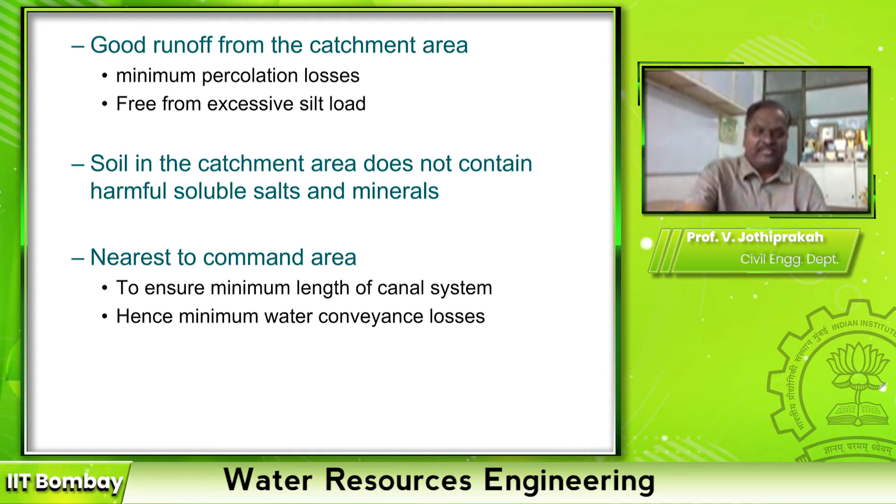These are some of the points: preferably a deep reservoir so that evaporation loss will be very less, land cost per unit capacity is less, and it is less prone to weed growth.

Weed growth means when the dam is full, the water is under submergence. When the depth is small, more area will be under submergence. Even when you draw the water less than 1 meter, more area gets exposed, so there will be a huge growth of weeds. Unnecessarily, next year when water comes, it will take more water than what you draw for the downstream side.

Then water quality depends upon the soil type and vegetation type on the upstream side. As far as possible, the dam site should be away from flooding tributaries, mainly to prevent sediment flow, and it should have impervious rock formation for minimizing leakage in the riverbed.

Otherwise, you store the water and next year all the water goes into the soil. It will work as a percolation pond rather than a dam.

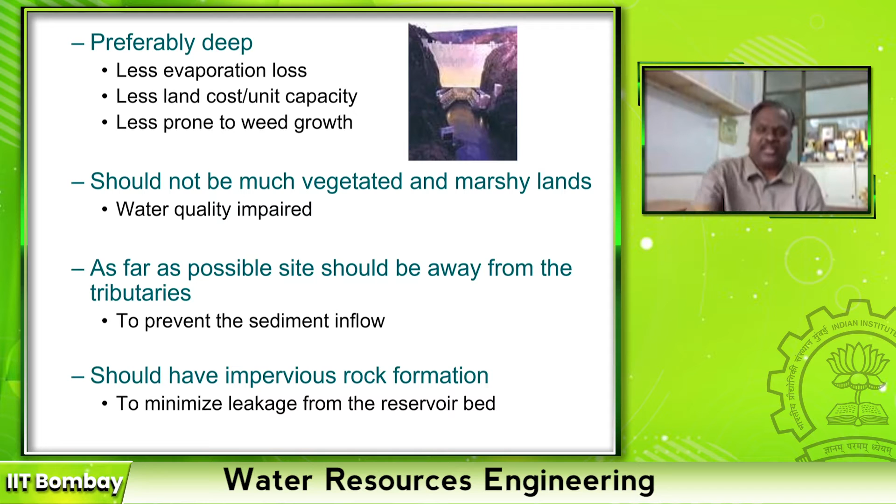The reservoir banks adjacent to the hilly region should have good abutments for stable construction of the dam. The acquired land to be submerged in the reservoir should not be very valuable, like areas with settlement of population. That's what we also do rehabilitation and resettlement for.

Resettlement and rehabilitation is called RR policies. A huge number of researchers are working on how to settle them, because when I construct a dam across the river for a particular height, a huge area, kilometers square, gets submerged under water.

Whether any settlements are there, we have to do proper resettlement. The next consideration is that the selected site should be easily accessible through roads and railways during construction and after construction, for operation and maintenance.

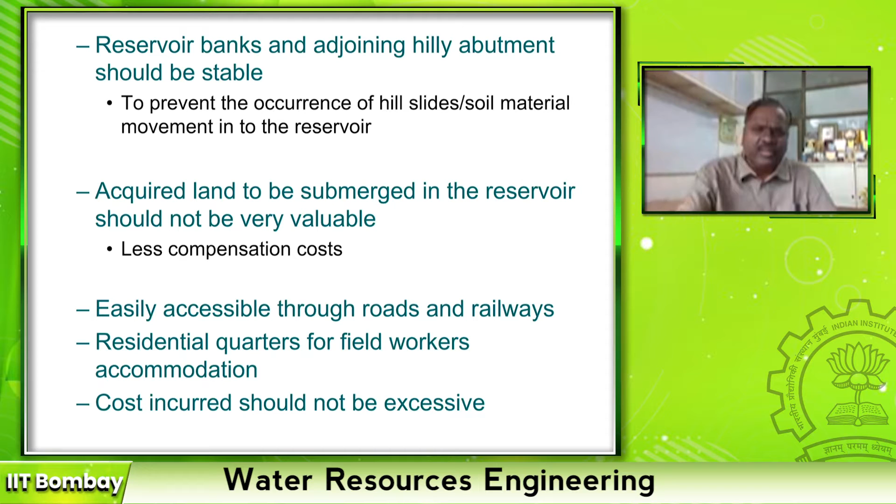Residential quarters for field workers, or office quarters after construction of the dam, should be constructable there. Then the cost incurred for the construction should not be excessive. These are all small considerations.

After considering these 4 or 5 factors, you select a particular site. For each and every site, we should do site-specific investigations. What we have done so far is site selection.

Site selection actually means considering the surrounding of the site. When I select each and every site, I must do the site investigation, so that it becomes a sound and economical project. This includes the study of various alternatives regarding the layout of the scheme.

If I do a dam at this site, what are all the other alternative constructions or layout requirements? The final alternative selected site shall be fully justified, so that after starting the work, nobody should point out that the wrong site was selected. So before selection, we have to do all the possible investigations.

Once I select 2-3 sites for the dam construction, the first step is to do a topographical survey, that means you prepare a contour map. I think you have studied this in your geodesy course, you have to do a contour map.

This can be done either by plane table surveying, traverse, aerial photography, or using any other surveying methods, mainly to prepare a contour map to determine how much water will get spread in that area.

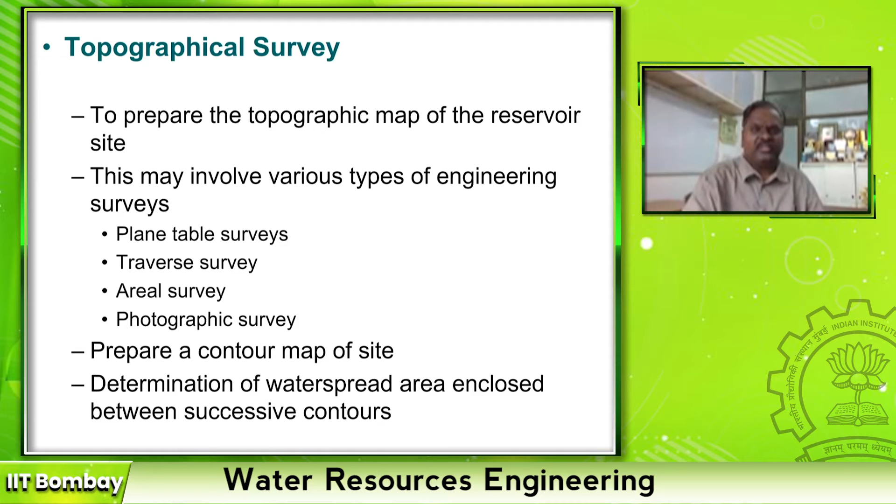There are three types of volumes: we have seen dead storage, useful storage, and flood storage. How to store it, then the area elevation curve - how to draw this area elevation curve? We will see one by one.

Suppose if my height of the dam is up to the 2 meter level, then the area of submergence will be up to the area contour line of 2 meters. If my dam height is 3 meters, then the area of submergence will be at the banks of the 3 meter contour. Then at 4 meters, this area gets submerged. At 5 meters height of the dam, the 5 meter contour gets submerged. So as the height of the dam increases, the area under submergence also increases.

See, this is not the differential area. That means it is not just the area between 4 and 5. It is the cumulative area from the face of the dam up to 5.

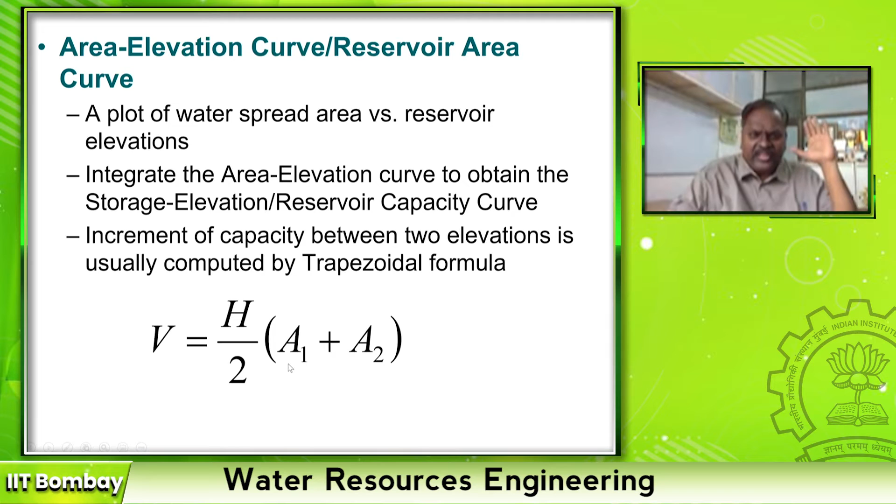So then we can use our simple trapezoidal formula. Height and area between the contours 1 and 2 will give you the incremental area, the incremental volume. So once I know the volume for each and every height, you can find out the volume. As the elevation increases, the volume of water stored will also increase, and this volume of water is also called the capacity.

That is why the dam height matters. Everybody asks why people are fighting over an increase of 11 feet or 6 feet. But let us take a water dam height from 156 meters to 162 meters. This is a 6 meter difference. So what is the capacity? It's very small, maybe 2 to 5.

But the same 6 meters at a very high elevation, when the dam height is 192 meters and I increase it by 6 meters, what is the capacity then? It varies from 77 to 110. How much volume of water will get stored? Then what will be the increase in area for this higher level? It is from 30 to 42 hectares. So as the area and volume stored at higher elevations of the dam will be more and more.

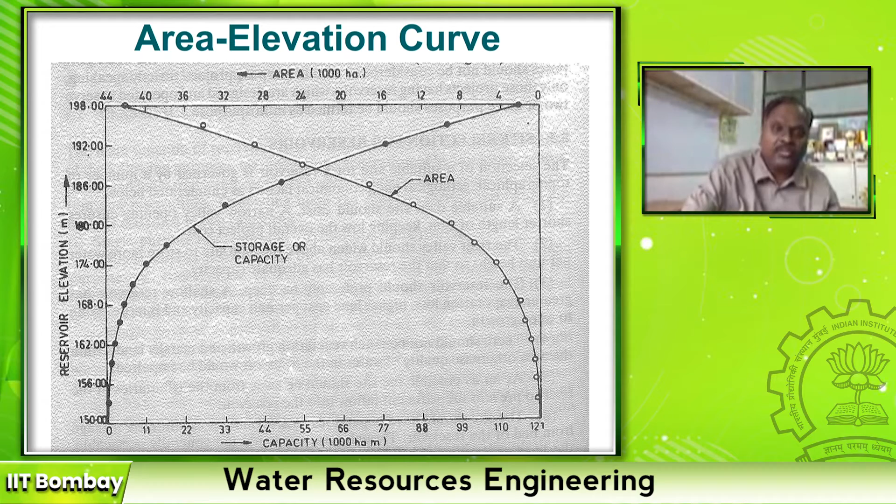And this curve we have to draw for different locations which we have selected. So you can use cone formula, Simpson's formula, whatever it is, for a cumulative, accurate area estimation. These are all conventional methods. Nowadays we have different methods to estimate the volume.

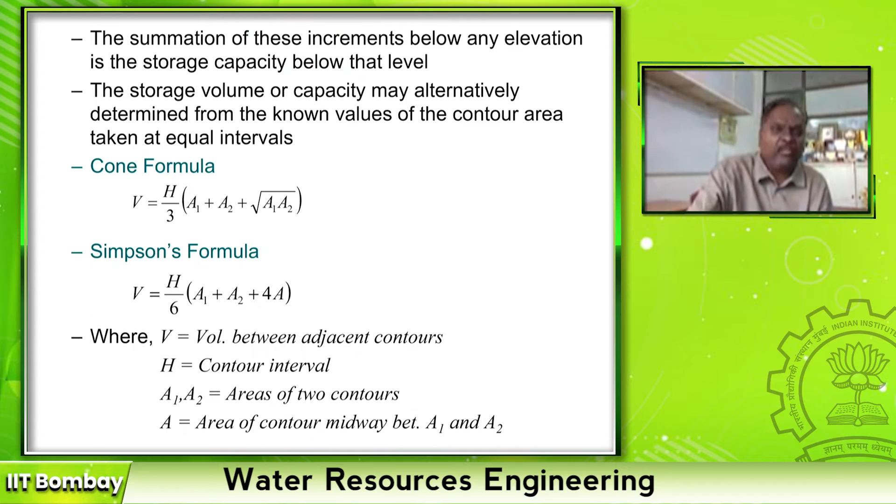Once I fix this area-elevation curve at different sites, I can find out which is the most economical — where the area of submergence is less, but at the same time the volume of water stored is more. That means you are selecting a narrow valley. Sometimes the area under submergence will be larger, but the volume of water stored will be smaller compared to other sites.

Then your evaporation loss will be larger, sometimes seepage losses will be larger. But the most economical section is a narrow valley — that means area of submergence is less, but volume of water stored is more.

After selecting through this topographical survey, we can go for geological investigation, because sometimes a narrow valley is there, but the foundation is not good, so I cannot construct a huge structure there. This geological study includes the structural features of the underlying aquifer like fold, fault, fissures, their nature and extent. Deep, thorough investigation is required, because the reservoir constructed should be watertight.

Watertight means there will be seepages, but it will get stabilized over the period of time. But when I store the water and there is a fault or fissure below the foundation, all the water goes through that to the downstream side. So before I use the water for economical purposes, water in the reservoir gets released to the downstream side because of natural fissures. So then we have to do this type of investigation, checking whether there is any sink hole or solution cavity in the dam where I have selected this cross section.

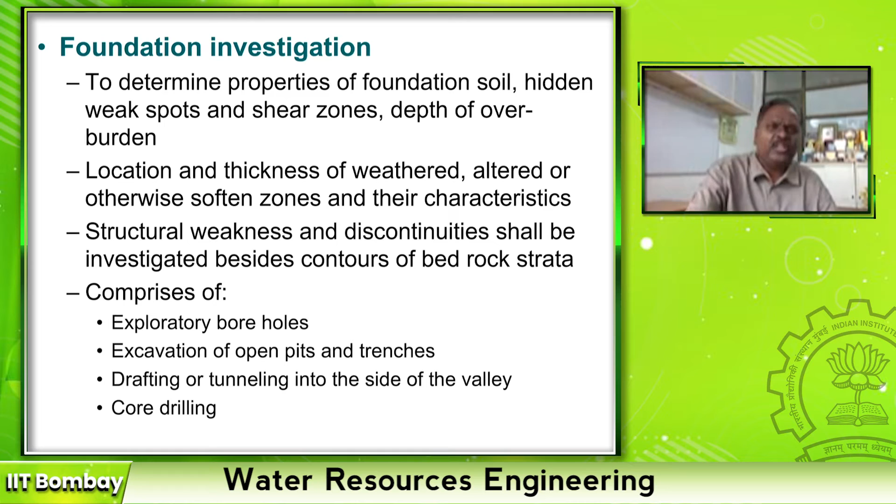The second important aspect is meteorological and hydrological studies. For meteorological studies, on the watershed plan we should study the prominent orographic features - sometimes orographic precipitation also causes filling of the dam. Then what are the annual isohyets in that catchment area? Catchment area is the area from which the dam will receive water.

Then the location of rain gauge stations - is it already existing or do we need to install and study? Is there any gauging station on the upstream side as well as downstream side? And then interstate boundaries, political boundaries - all these things we may have to consider in the meteorological studies.

After collecting this data, first assess the weighted rainfall in the catchment using either the isohyetal method or Thiessen polygon method. The isohyetal method is the best method which takes care of the non-linearity in rainfall between one station and another. Then collect and evaluate data for frequencies of heavy rainfall for flood studies. Then determine the standard project storm and probable maximum precipitation over that catchment area.

Also analyze the maximum and minimum temperature, average wind speed to find out wave height, and relative humidity - so analyze all the meteorological parameters.

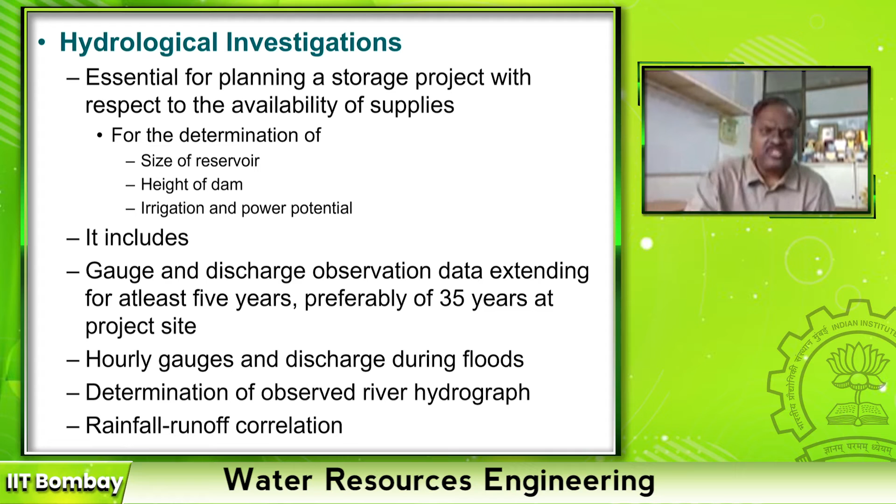How do we find this height and capacity of the dam? There are three storages I mentioned: dead storage, live storage, and flood storage. We will see one by one - to know that, we should know what all the different storages are.

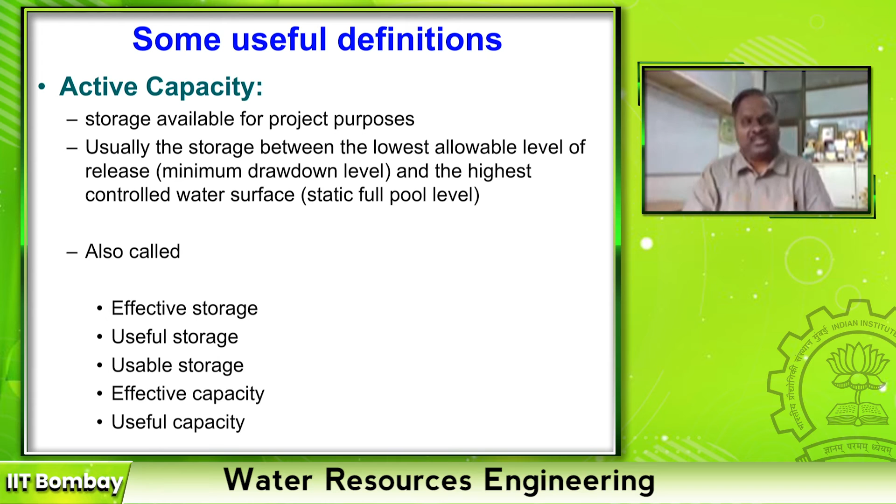The first storage or capacity is active capacity. Active capacity is nothing but the storage available for project purposes, normally between the minimum drawdown level and the maximum water surface. This is also called effective storage, useful storage, usable storage, or effective capacity. Active capacity is nothing but useful storage - that means I may store thousands of million cubic meters, but I may only be able to draw 200 million cubic meters. That is the useful storage.

This area capacity curve will help us find out the possible relationship between water spread, storage, and elevation.

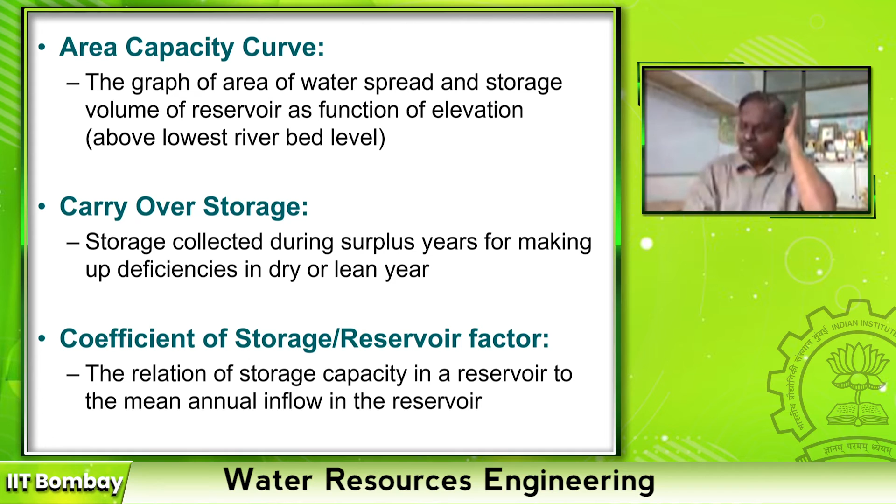Carryover storage is when I have estimated the discharge in a year at a site. Suppose if I use all the water flowing in a year, then for the next year's supply, the next year's flow has to come. Instead, whatever water comes in a year, I will store more than my demand. Then the leftover storage will be carried over for the next year. If the next year is a lean period with less flow, this carryover storage will be used. But most of our reservoirs only do 1 year planning, right?

The coefficient of storage and the reservoir factor is based on the annual inflow estimated over the period of a year. Inflow means the water flowing at a site, and it varies every year depending upon rainfall. But I fix a constant capacity of the reservoir, then I estimate a ratio called capacity by inflow.

Normally the capacity of the reservoir should not be the 100% flow, because the annual flow is always tagged with probability. So that is where you estimate 75% dependable inflow, or 50% dependable inflow, as the capacity of the reservoir, so that the volume of water stored is used better and the downstream side also receives the remaining flow.

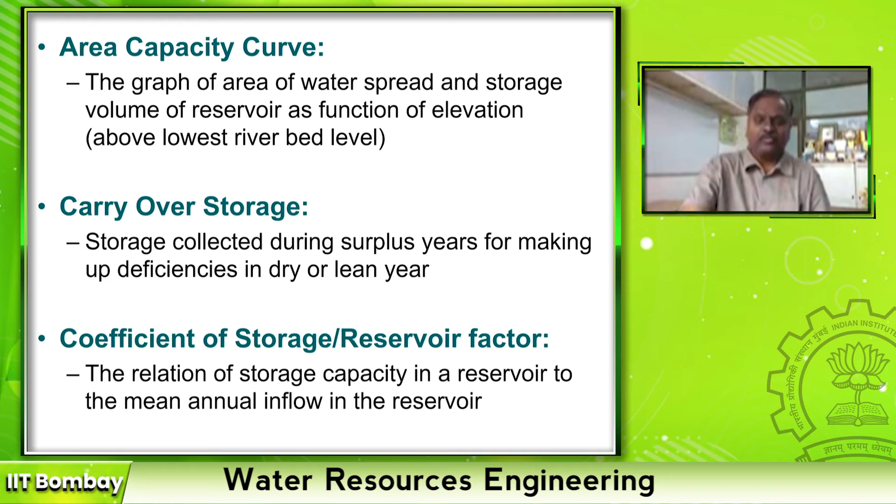Then power storage - sometimes I need to estimate the power. Most dams store water that is used for power production, and the same water is used for irrigation. But there may be some locations where water stored for power may not be useful for irrigation, as it may be moving away from the main river. Then I need to store that extra water for power.

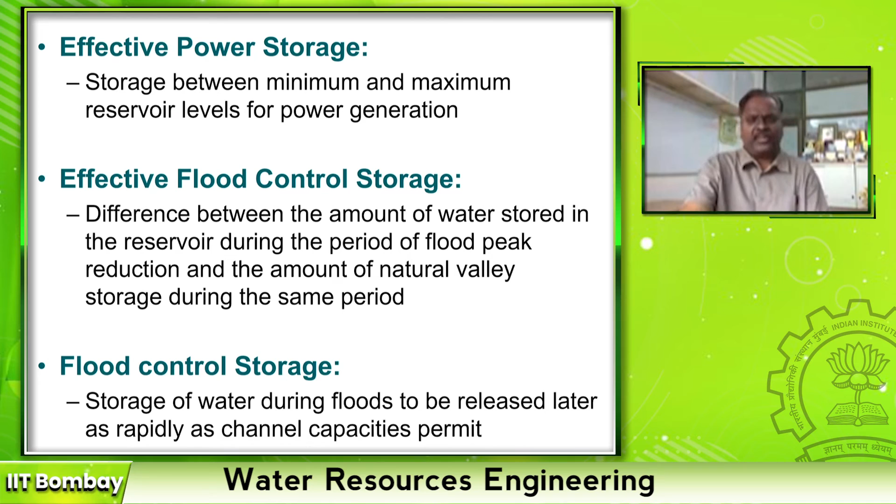Then flood storage - we have used several equations to estimate the flood, and that much quantity of water has to be stored in the dam. That is called flood control storage, and then I need to release it properly through the surplus weir.

Then the storage cycle is the period at the beginning and end where the reservoir contents are the same. For example, in India we always start our storage from the dead storage level, so every year, because we cannot draw below that dead storage level, my reservoir is empty. In that storage cycle, that year I receive good flow and my reservoir fills. Then whenever it again reaches the dead storage level, that is called the storage cycle.

Most of our dams have a storage cycle of 1 year. That means if there is a monsoon failure, that year I will not release any water to the downstream side. Then surcharge storage capacity is above the maximum operating level. I said there are certain dams where I store water even above the spillway through gates, sometimes as storage as well as flood water. That is called surcharge storage.

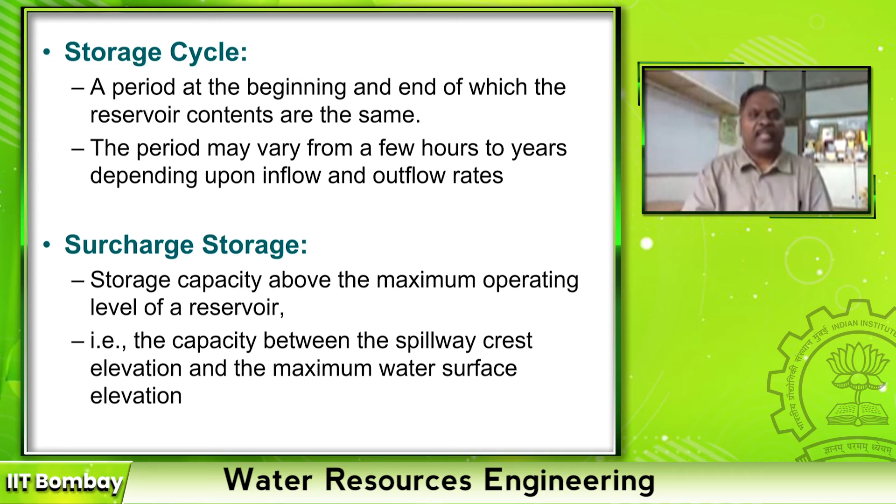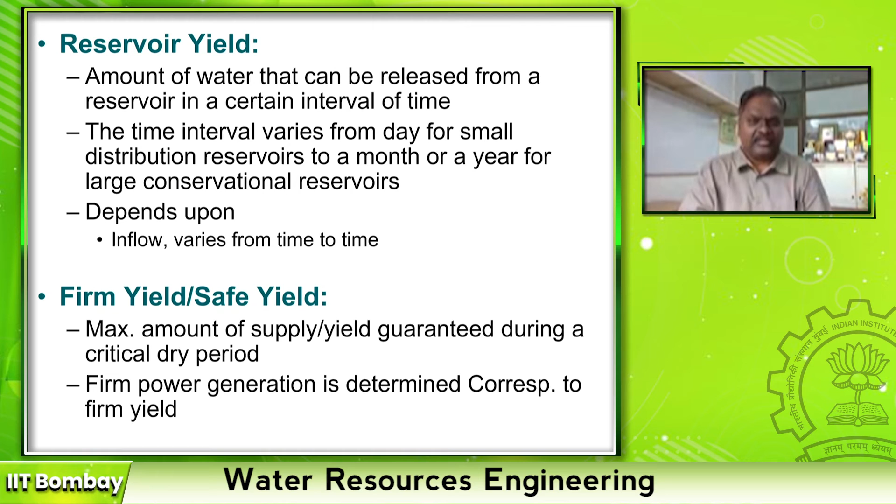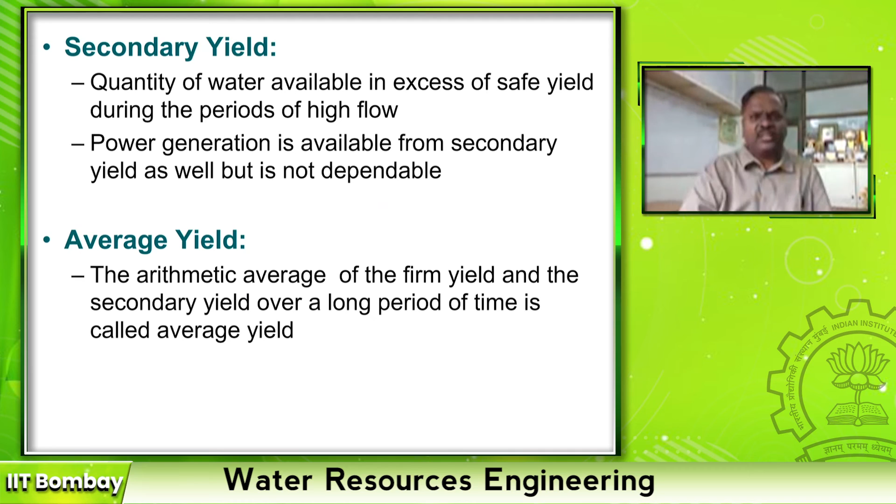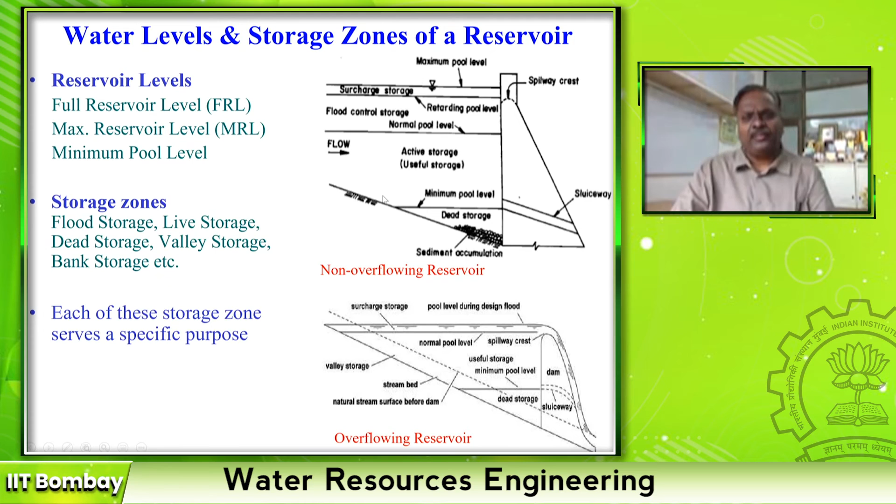And then the volume of water stored in the banks is called bank storage. So this is the explanation for all these things.

Normal reservoir level is the level corresponding to the gross storage, which includes both dead storage and live storage. That means the spillway is not discharging any water, it is stored.

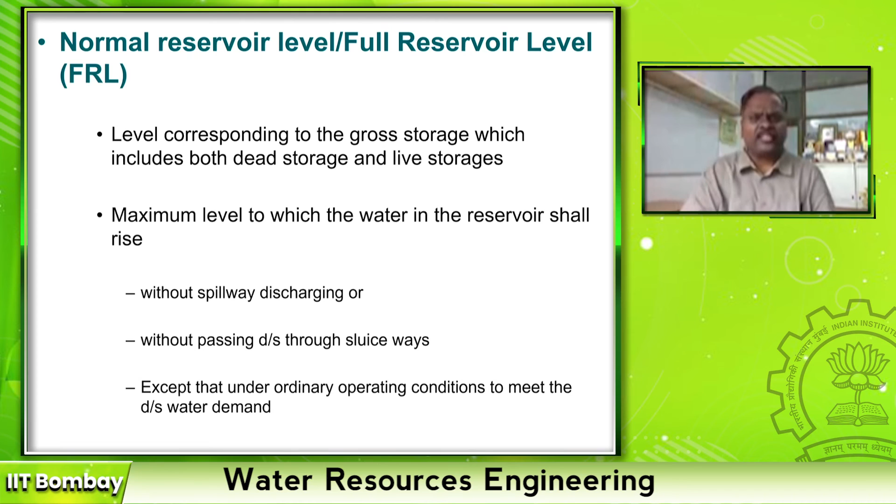The maximum reservoir level is the level to which the water in the reservoir shall rise during the design flood. The space between the full reservoir level and maximum reservoir level is reserved for flood waters. This is fixed by routing the design flood through the reservoir and spillway.

Even above the maximum reservoir level, there is the freeboard of the dam, which depends upon the height of the water you are storing. It should be minimum 3 meters. That means there is sufficient time for the executive engineer to operate the dam gates so that the water will not overflow the dam. That is the freeboard of the dam.

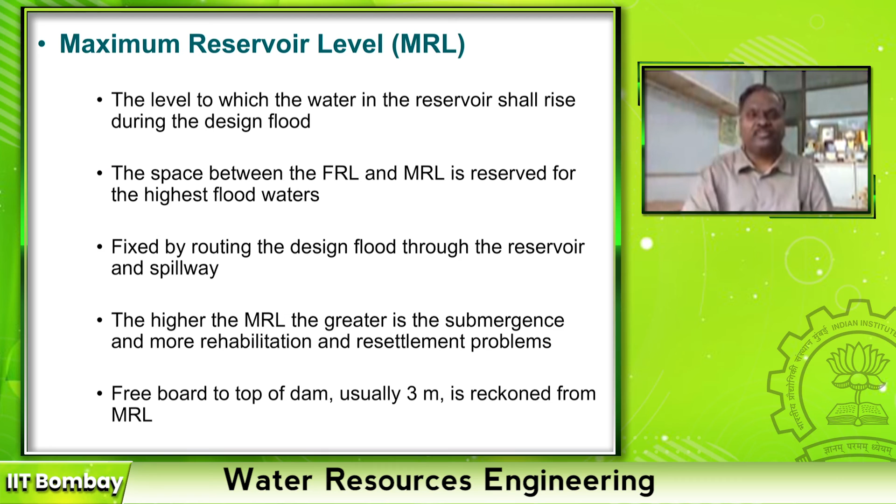Minimum reservoir level is the level at dead storage, so I cannot draw any water. People always say, oh, I went there, there is a huge quantity of water in the dam. Actually that is the dead storage level, where by gravity you cannot draw the water, only by pumping you can draw the water.

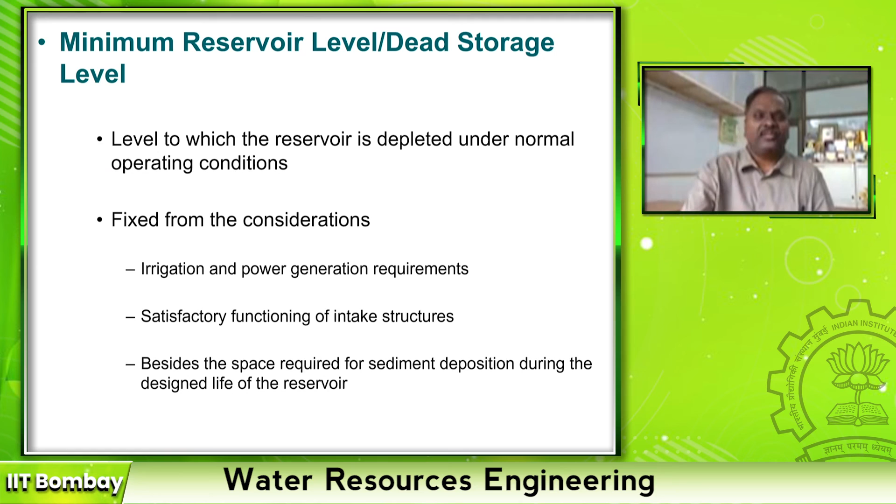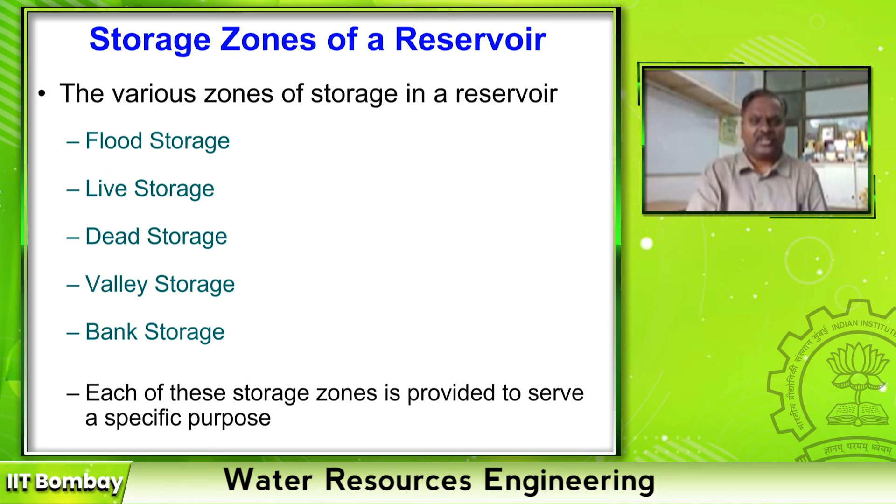And these are all the different storages, as I said: flood storage, live storage, dead storage, valley storage, and bank storage. Each one has their own specific purpose.

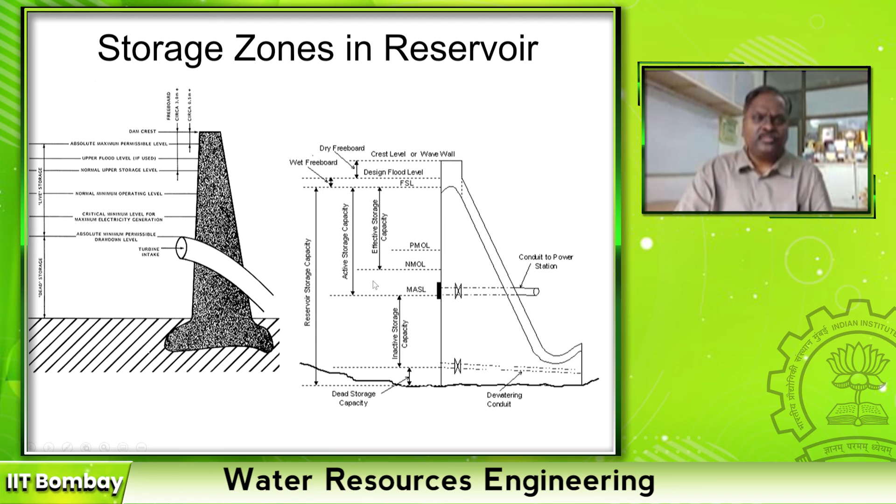Then this is the minimum drawdown level. That means the minimum drawdown level is the level at which I have to start supplying water for various demands. This inactive storage is sometimes required for the living beings upstream of the catchment, like animals, natural vegetation, all these things.

So these are all different storages. And the bank storage is developed in the voids of the soil cover in the reservoir area, due to seepage. When water level drops down, this water comes back into the reservoir.

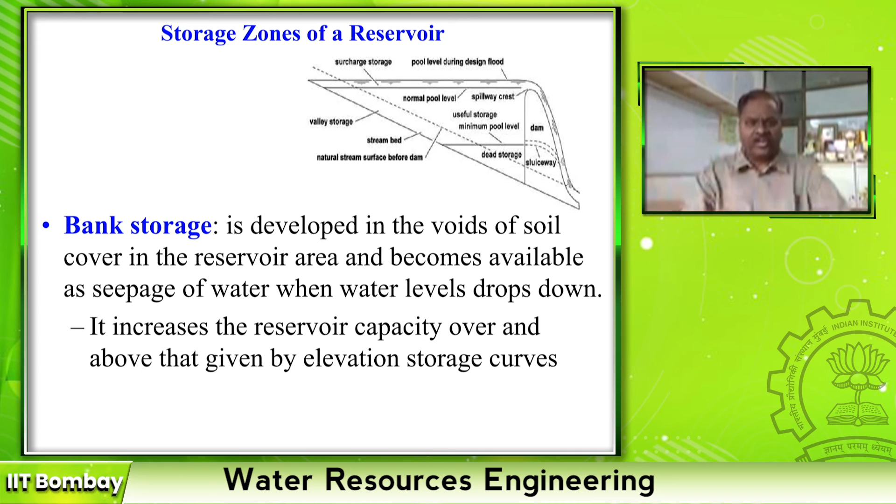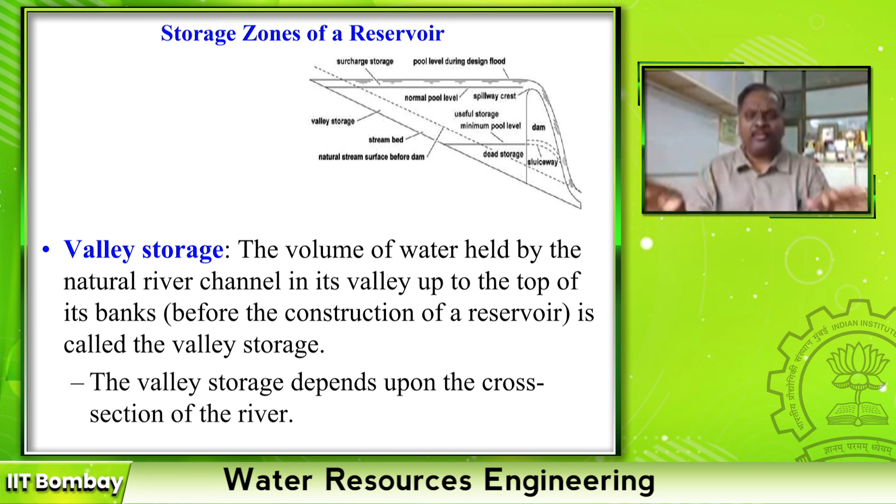Storage between the full reservoir level and maximum reservoir level is temporary storing of the flood water, this portion.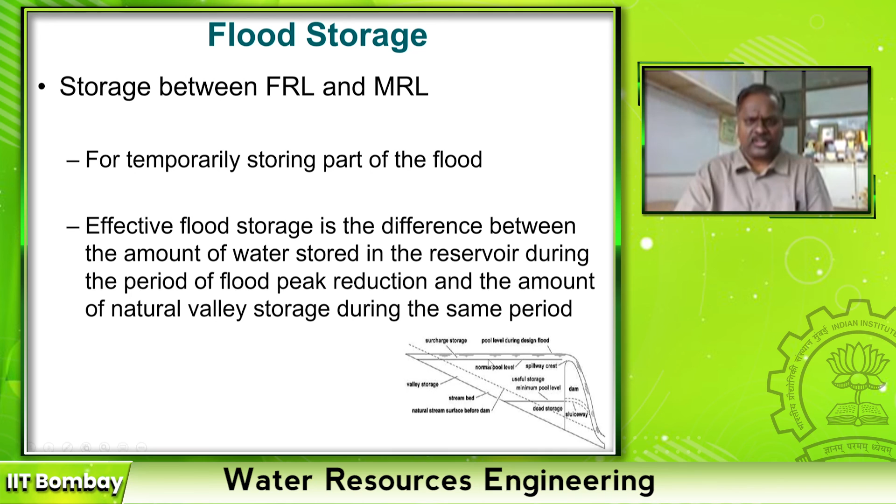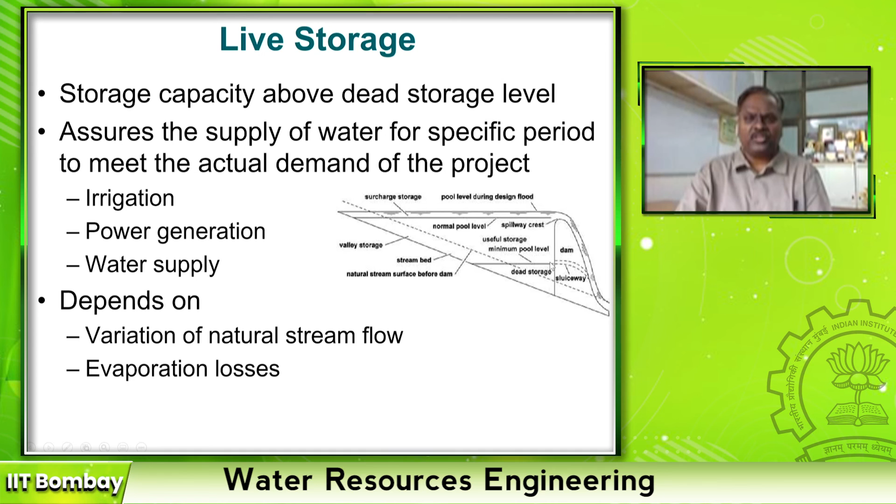This storage is what we are going to use for various purposes like irrigation, that is between the dead storage and flood storage.

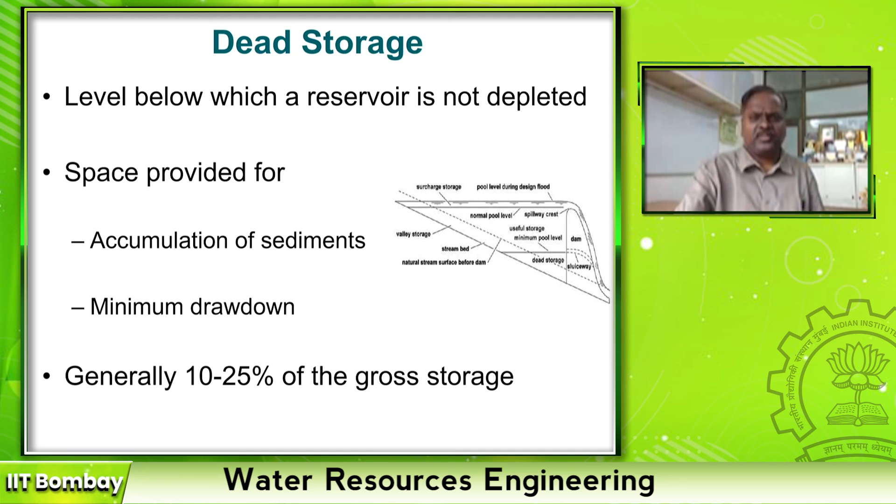Dead storage is the volume of water stored in an area intended for sediments. Until the sediments get accumulated, water will be stored there. Once this volume is filled with sediments, you cannot find any water. Normally this is taken as 10 to 25% of the gross storage, but nowadays it depends upon better studies of sediments.

Now we will see how to estimate these three important storages: live storage, dead storage, and flood storage.

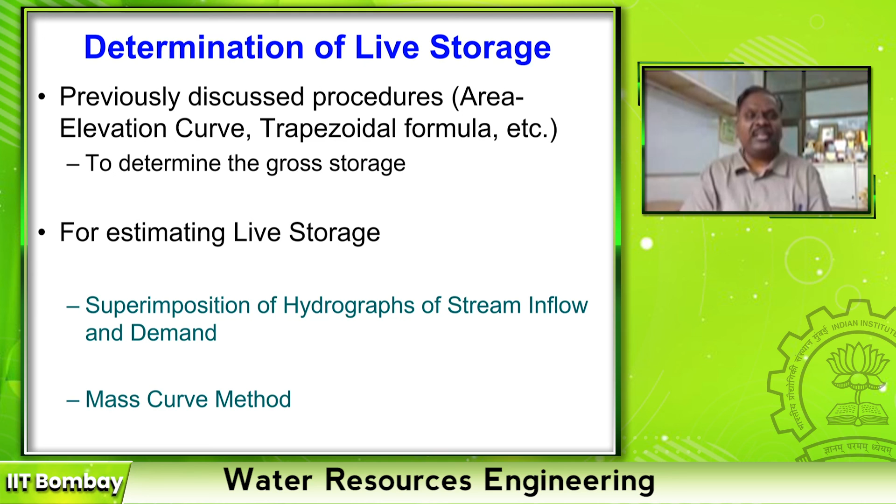Now we will see the method to find this live storage. We have studied this earlier in runoff as well. It is estimated using a simple method called the mass curve or Rippl diagram. Nowadays we also use the sequent peak algorithm method to estimate the live storage of a dam.

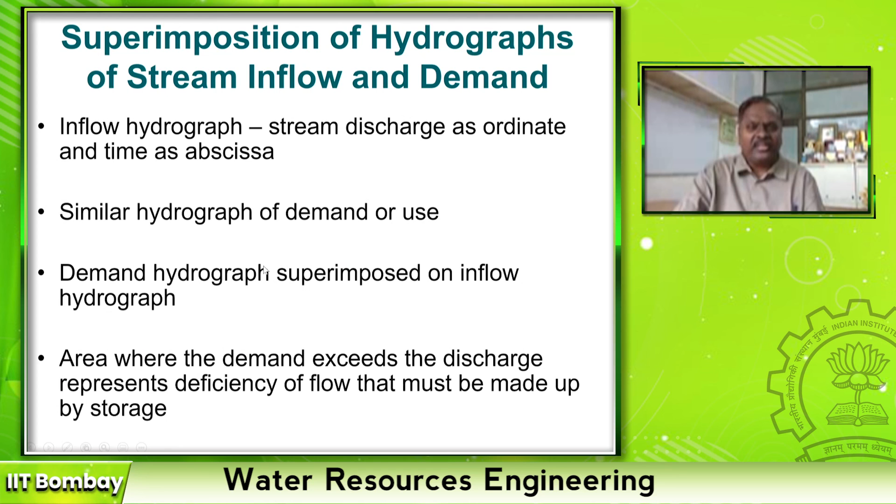So we superimpose the hydrographs of stream flow and demand. It's not simply superimposing the hydrographs, but the cumulative hydrographs: cumulative inflow over the period of time and cumulative demand over the period of time. We superimpose them, always starting the demand from the peak of the cumulative inflow. Then the difference between these two will give you the storage.

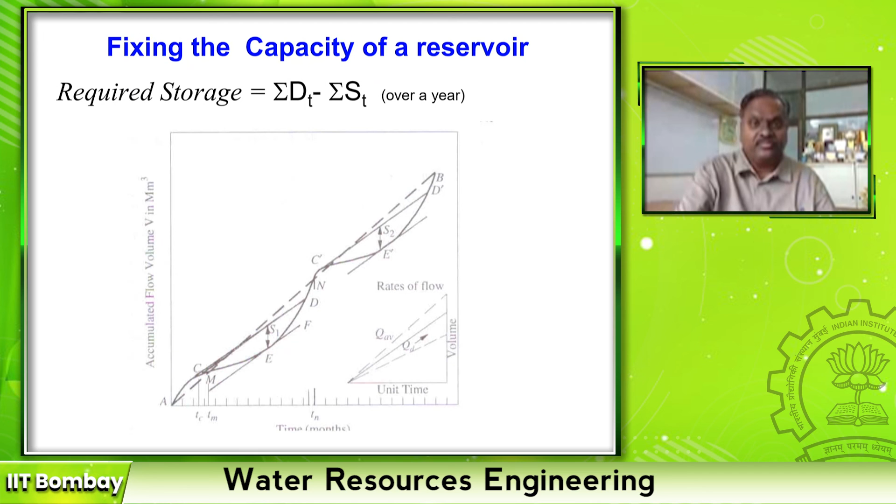This example I think we have solved in our runoff class itself. Or we can do it by another method called the sequent peak algorithm.

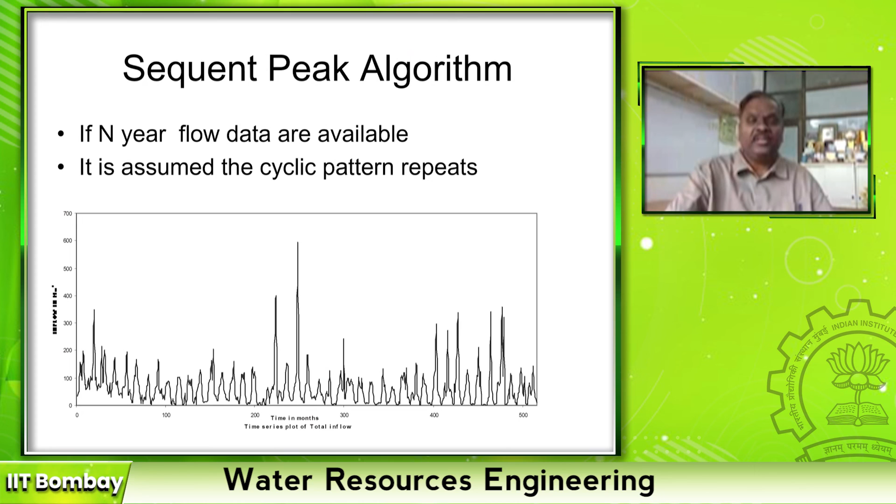When I have a sufficient number of data points, estimate the cumulative surplus and deficit, and find the cumulative of the surplus and deficit. So my cumulative values may be increasing or decreasing depending on which is more, either deficit or surplus. Then the capacity between the sequent peaks and the troughs will give me the capacity of live storage. The maximum difference is taken as the live storage of the reservoir.